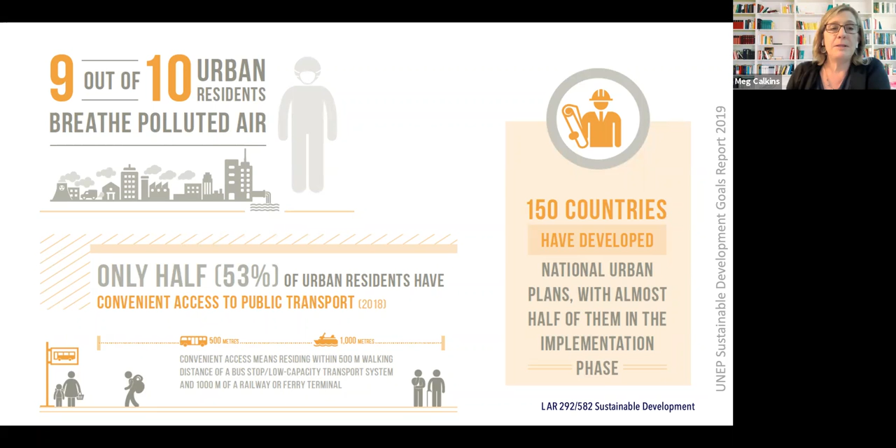Before we start talking about what makes good cities and things we can do in cities to improve them, I want to remind you of some environmental impacts of cities and communities. We talked in module 3, in the water module, about how stormwater in cities is a huge issue because of the extreme impervious surfaces of rooftops, streets, and parking lots. We get concentrated stormwater that degrades our waterways. We also get pollutants running off of the rooftops and the streets into our waterways. This is a huge environmental impact in cities.

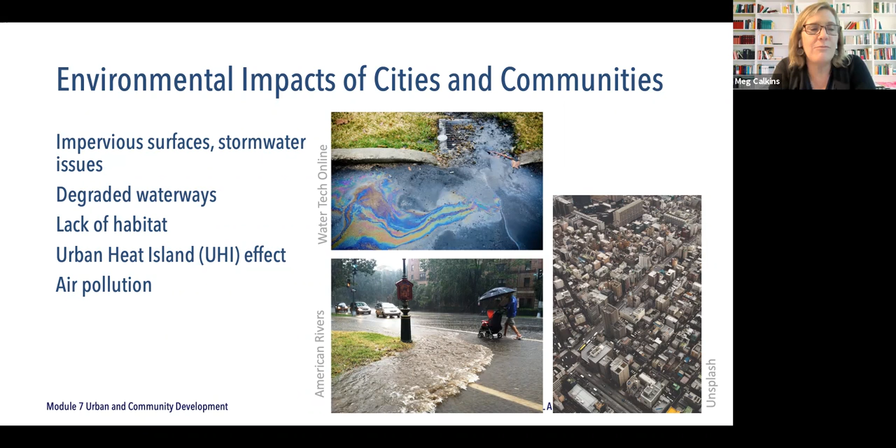There is a distinct lack of habitat in cities. And cities also have a problem with the urban heat island effect, which we'll talk about in just a minute, and air pollution.

So the urban heat island effect is something that happens with all of the impervious and dark colored surfaces in urban areas. Late in the day, the sun has been absorbed by all of these surfaces, streets, parking lots, building rooftops, many of which are dark colored, and the heat starts to radiate out of these surfaces that have absorbed the heat. So in a typical weather condition on an 85-degree day, say in suburban residential areas or in rural areas, the same weather condition might be 7 or 8 degrees hotter in an urban condition.

This is huge in terms of air conditioning loads, health of the urban residents, et cetera. The image on the left is an infrared photo of Louisville, which is a city, but not a huge one. Still, you can see how much hotter it is in urban Louisville than it is even just across the river in areas with more vegetation. Obviously the blue areas are the cooler areas, and it's not a coincidence that these are all the vegetated areas. And then, of course, the very urban environment of downtown Louisville is much hotter.

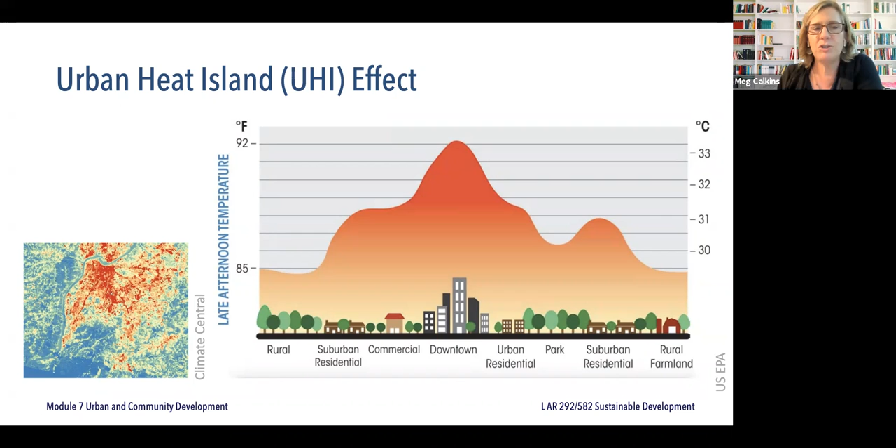Aside from air conditioning loads, we care because this has a tremendous impact on human health. Ground level ozone forms when heat and sunlight allow the reaction of two very common pollutants, nitrogen oxides and volatile organic compounds, or VOCs. What happens is the ground level ozone gets trapped at the level of the buildings and the streets.

This has a tremendous human health impact in that people breathe this polluted air, and the most vulnerable people, the elderly and children, really suffer from it. Incidences of asthma are multiple times greater in children who live in cities than in children who live in suburbs. This is a huge problem, same thing for elderly people. But really, it's not good for anyone to breathe air pollution.

It's very surprising how many days of the year it is unsafe to breathe air outside in some of our major cities. Los Angeles is one of the worst. Cities in the Southeast and the Southwest suffer most from urban heat island impacts.

Looking at this diagram carefully, what happens in cities is that poor air quality gets trapped between the buildings and it just continues to recirculate. Poor air quality results from trucks, buses, or cars stopping and starting, and it gets trapped in the canyons. Air pollution is much greater where traffic idles, so where you have a traffic jam. Braking and accelerating increases vehicle emissions as well. Unfortunately, children are closer to the vehicle exhaust and to higher pollutant concentrations, and of course they suffer more.

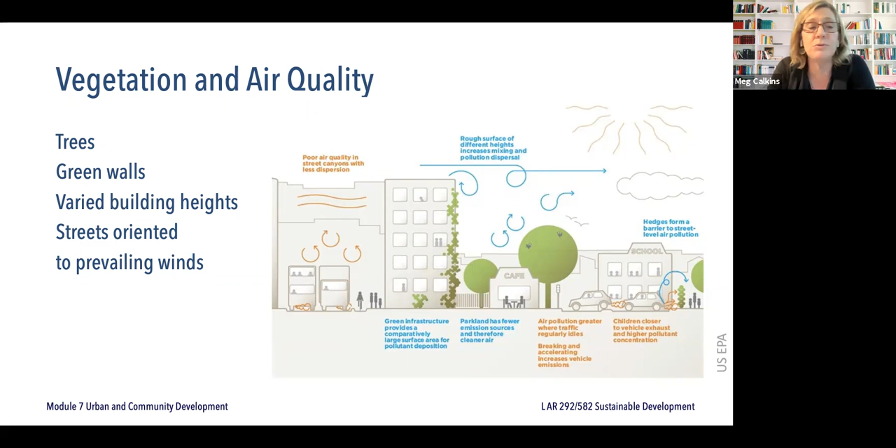Additionally, cities oftentimes have unsafe streets. And more than anywhere else, there are equity issues in cities. Poor people who live in cities have unequal access to transit, less access to transit, green space, and healthy food. Wealthier people who live in cities have more access to transit, green space, and healthy food. So cities really tend to highlight equity issues.

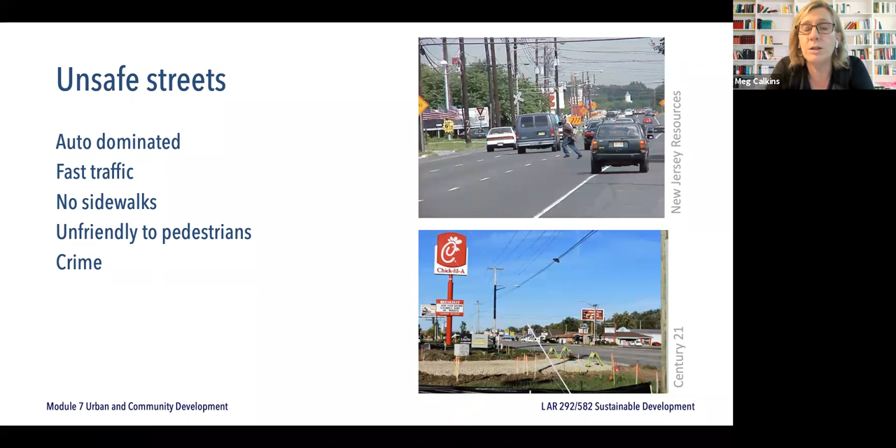So the last major issue with cities is unsafe streets. Our streets in cities and suburbs are auto-dominated. Traffic planners for years have tried to move traffic through urban and suburban areas as quickly as possible, to get as many cars moving quickly and out of the way to their destinations. A lot of streets don't have sidewalks, so they're fairly unfriendly to pedestrians. When you have buildings set back from the street, you don't have people's eyes on the street, so you have a lot more crime happening along the streets, especially where pedestrians are trying to walk. Safe streets are a really key aspect of sustainable communities.

The Project for Public Spaces has a great website if you're interested in this issue, and we'll talk more about them in the other lecture in this module. They have identified the benefits of great places and the qualities of great places.

A great place has good accessibility. It's more walkable, it's safe for pedestrians, it has public transit that's accessible, and good connections between different uses in the place. A great place builds and supports the local economy.

There's entrepreneurship, economic development, higher real estate values, local ownership, local value, etc. A great place has good sociability, offers opportunities for social interaction, has a diverse population, and encourages creativity in the community and sociability. A great place promotes health: increased physical activity, access to fresh food, and greater social inclusion and security.

A great place nurtures and defines a sense of community. There's a sense of pride and volunteerism, perpetuation of integrity and values, less need for municipal control including policing, and it's more self-managing.

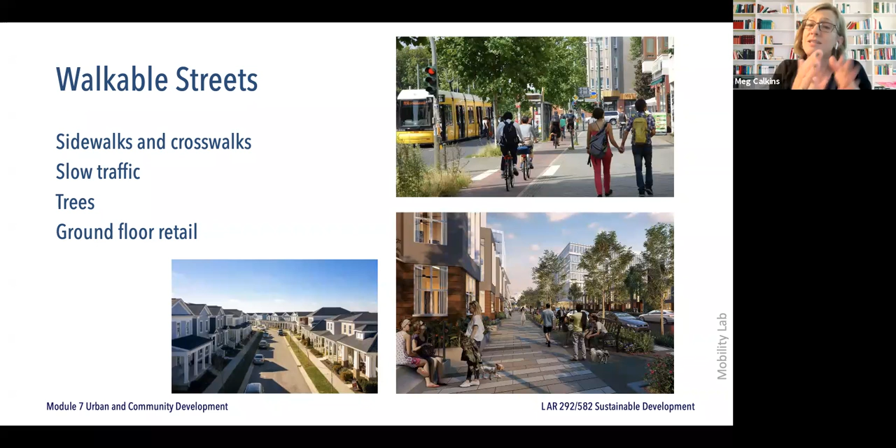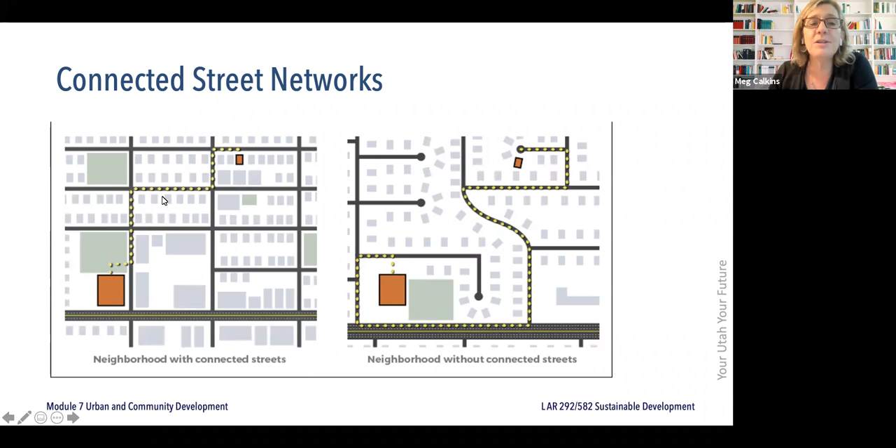Walkable streets are so important. Sidewalks, crosswalks, slower traffic, protection from traffic, trees, ground floor retail to create activity on the street, and retail that's relatively close to the street instead of set back, like so much of our suburban fabric, connected street networks. Instead of everybody living on a cul-de-sac and only knowing a few of their neighbors, having street networks where you can easily walk from one place to another without having to take the long way around and walk on a street where nobody lives and no commercial uses are located, but it's just a collector street for fast traffic. This is a much more walkable and safe neighborhood, but it's also pretty efficient for driving, but at slow speeds.

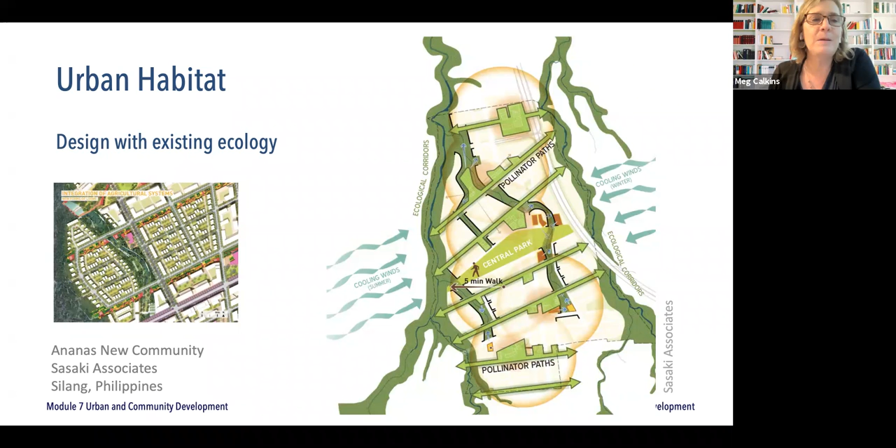Urban habitat is critical. In this diagram, this is a master plan for a community in the Philippines. These circles that are kind of yellowish orange are showing a radius of a 5-minute walk, so that every house in this community has a 5-minute walk or less to green space. Now that is access to green space. Additionally, this community grows food, and we'll hear more about that in the other lecture.

Urban and suburban infill is another good strategy to make good places. The upper example, of course, is our own Hillsborough Street, but even just filling in new housing where there are vacant lots can do so much for enlivening the street and making streets comfortable, safe, and walkable.

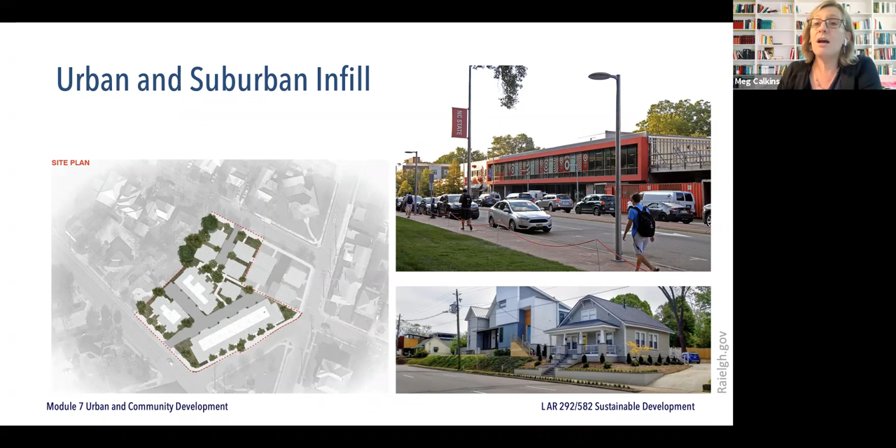And then the last strategy that we'll look at is the idea of a closed loop community. We'll look at a community in Stockholm that uses waste from one part of the community as food for another. So for instance, in the housing, the wastewater from the housing goes to the wastewater treatment plant. The biogas from the wastewater treatment plant is captured and used to fuel buses and vans in the community. The biosolids from the wastewater treatment plant are used as fertilizer for the farm fields. The purified wastewater is sent back to a heat plant and released to the sea.

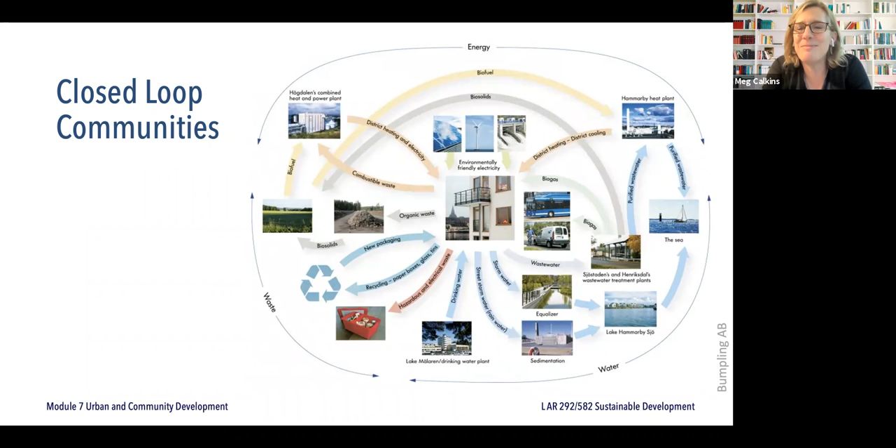That's not necessarily closed loop, but this is a really interesting community that is very similar to the idea of industrial ecology and closed loop resources that we talked about in module 5, but it's happening on the community scale. And there are other communities that you'll study in this module that are doing similar things.

And we'll also talk about biophilia and biophilic design as it relates to cities. We'll watch a documentary about the work of Timothy Beatley, who is a professor at the University of Virginia, pushing the idea of biophilic cities.

We will look at the Living Community Challenge. Now, we've talked about the Living Building Challenge. We've talked about the Living Material Challenge. There is also a Living Community Challenge, and some of these credits will look very similar to the Living Building Challenge and to the Living Material Challenge, the Living Product Challenge. But some of these ideas, net positive waste, net positive energy, net positive water, all translate to cities, as well as buildings and products.